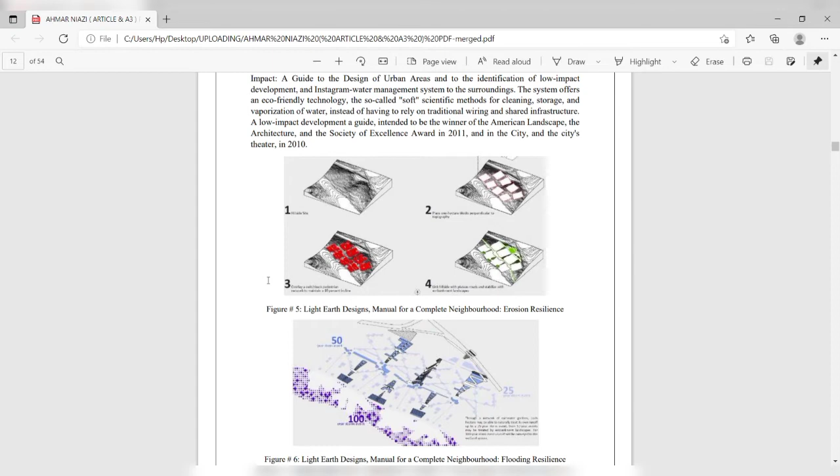There are some graphical representations on the contours. Then, a little research about house architecture shows a well thought out comprehensive house design which plays an important role in solving the problem.

He also talks about the other pressing problem of how to mitigate the impact of natural disasters, reduction of energy consumption, and creation of economic opportunities for less privileged income groups while creating comfortable areas.

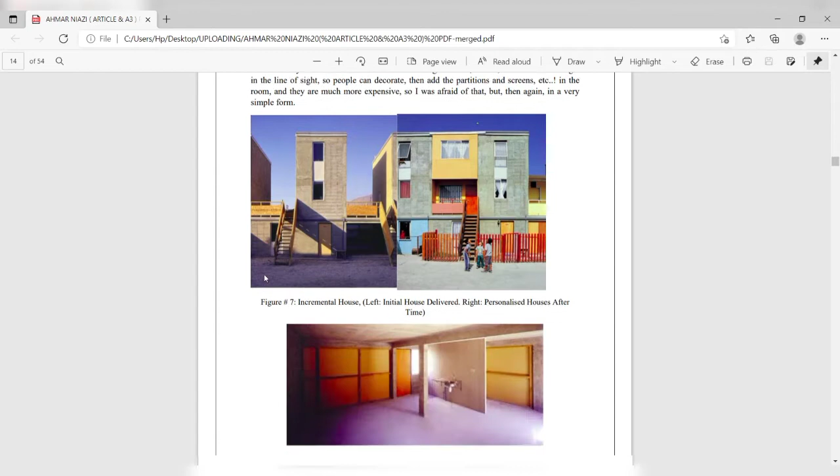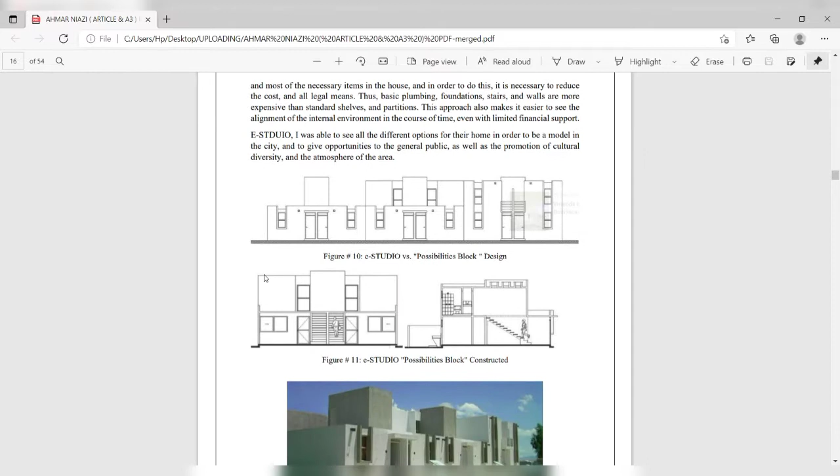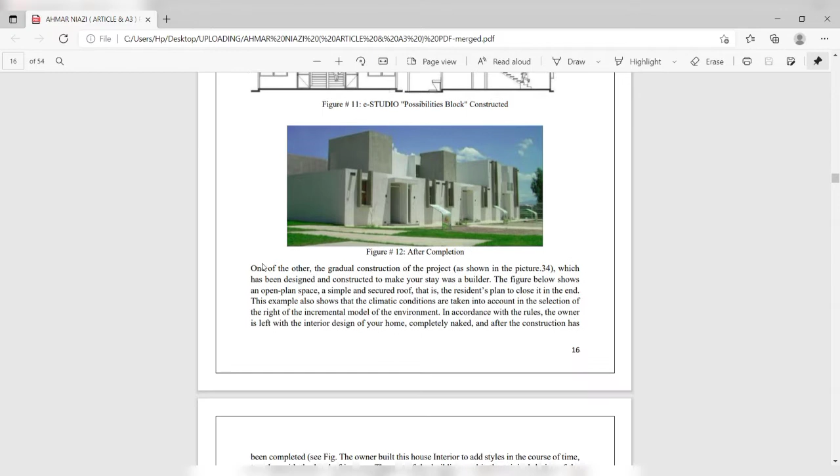This is the case study, also holding some graphical representation. There are some sections from the prototype house design. They are typically arranged in a row with the same module and core facilities to reduce cost and provide low cost facilities to the occupants.

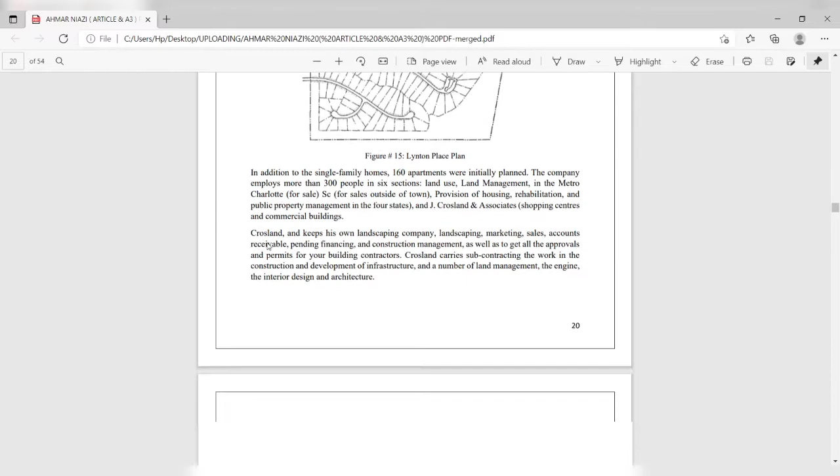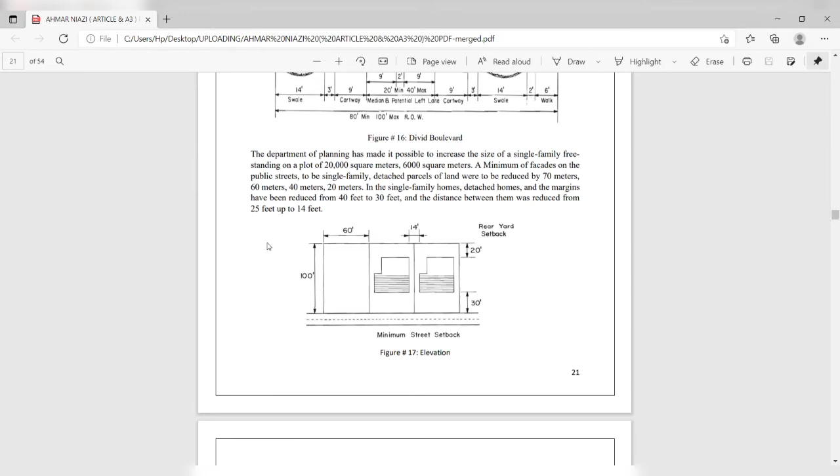Then there is a case study from North Carolina, with some organic grid pattern design, some site planning, some floor to area ratio examples, and at the end the key conclusions of this housing sector case study.

The analyzed sectors are the green and built area ratio, sustainable design, low carbon emission materials that should be environment friendly, well designed car parking to avoid issues in the society, well-oriented houses to gain appropriate heat in summer, green features, outdoor living areas, low maintenance exteriors, walkability and security. Then there is a matrix holding some comparatively similar modules or structures.

At the end, the conclusions drawn from analyzing the overall research are that affordability analysis should be comprehensive, taking into account total housing cost including utilities, taxes, and maintenance, as well as transportation cost, considering both short and long-term impact on the user and the land too.

No single strategy can meet all affordable housing needs. Most communities need a combination. Some lower income households need help repairing and maintaining their homes, which should maybe be subsidized by the government. Government sponsored and subsidized housing is important to serve people with special needs, but can only address a small portion of total affordable housing demand.

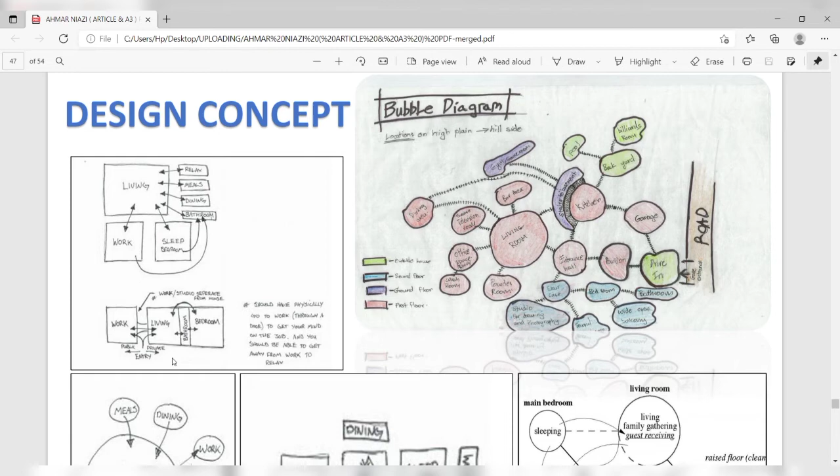The basic design concept starts from developing the relationship and bubble diagrams that show the relations of different spaces to maximize the outcomes from an architectural design. These are some bubble diagrams and a relationship chart.

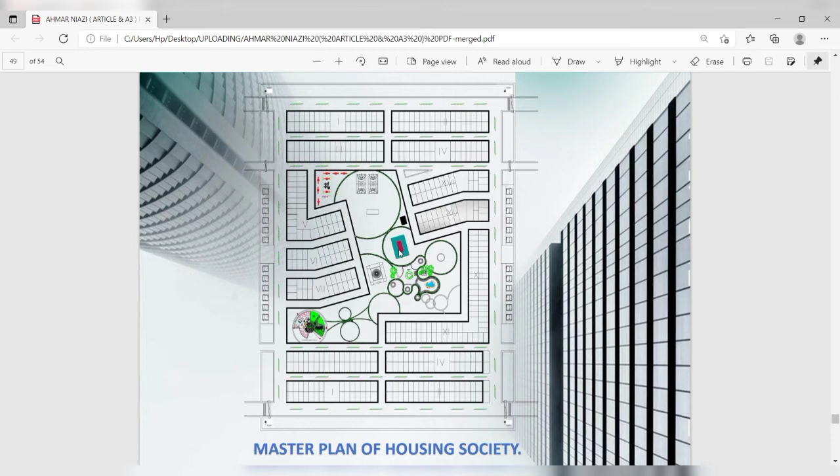Then the master plan. The rectangular boxes show the residential area or the prototype housing modules, which I can discuss further in the next slide, and the central main core facilitation area, which is according to local municipality laws.

Then the site analysis, which shows the location in Lahore, Pakistan, and the solar analysis approach from different landmarks. The overall site area is 17.2 acres, accessible from 3 sides, the major arteries.

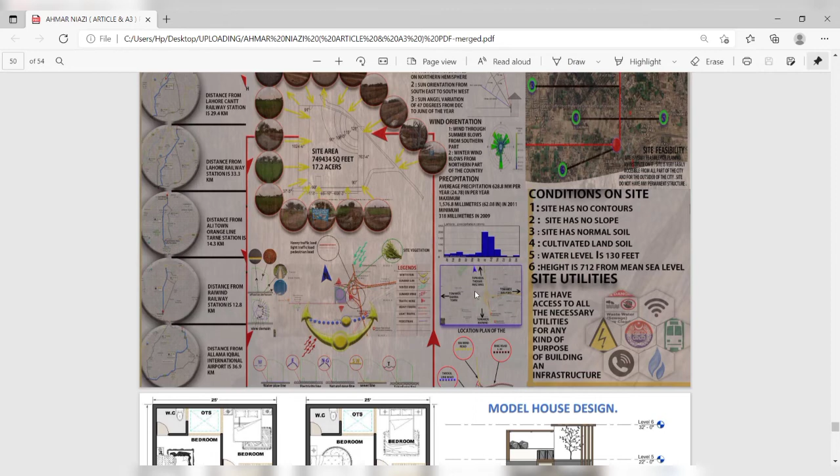The rainfall and other environmental statistics, solar studies. Also, the site has all the municipal facilities.

This is a prototype design for a house. From the left above corner, there are plans which show the core facilities, consisting of 2 floors, the ground floor and the first floor. On the right side, there are elevations and some 3D renderings.

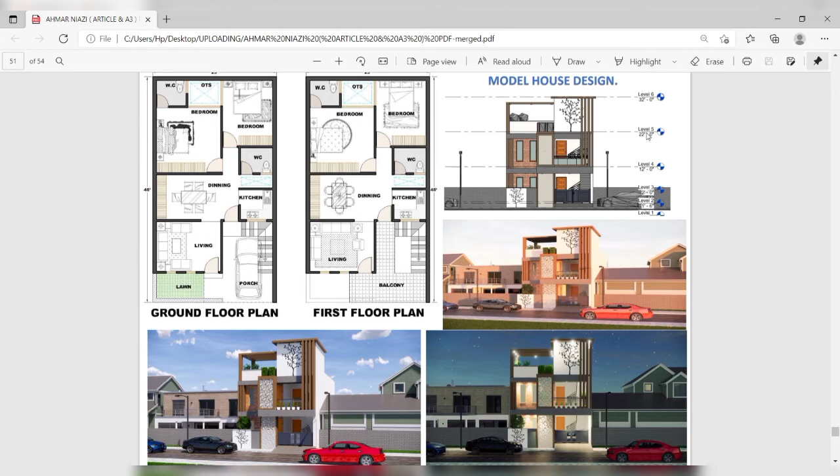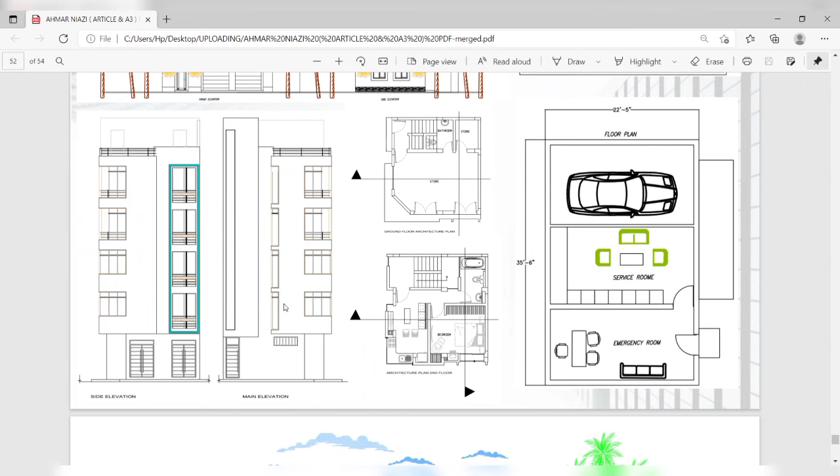Some plans for the basic facilitation center above, and the basic health unit also. Then the studio apartment building, which consists of 6 floors, and a section for the restaurant design.

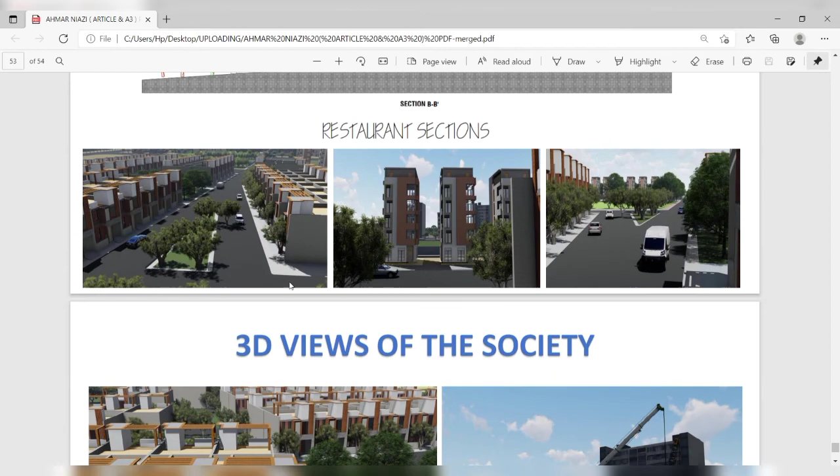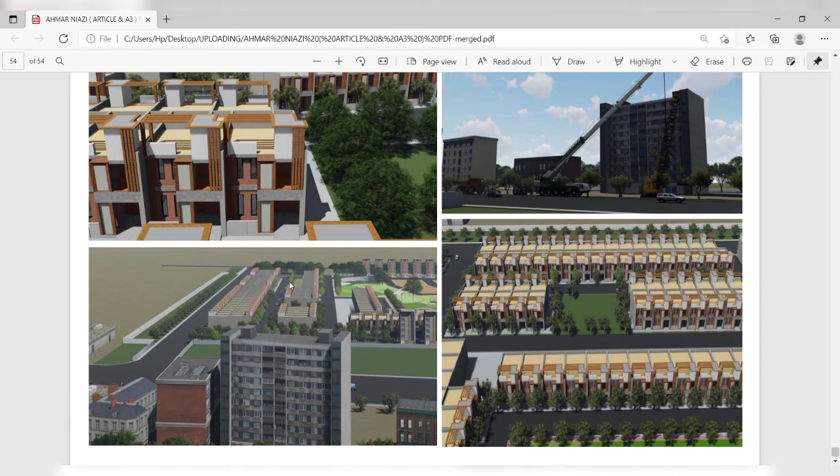Then there are some 3D views in front of the houses, showing the prototype house modules that typically follow for everyone. Some representations of the surrounding area of the site. Thank you.